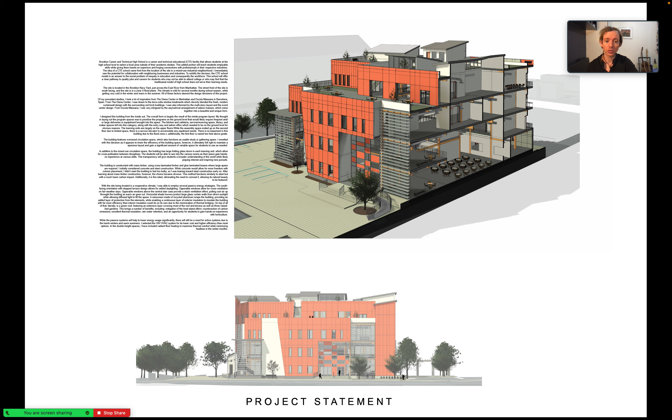A couple of the precedent models I took a lot of inspiration from are Escola Massana in Spain and the Diana Center in New York. I was really drawn to the off-kilter, boxy, sort of askew massing of these buildings, and I conceptualized them by massing them out in SketchUp and sketching. One thing I thought was really interesting was the terracotta window treatment on the Diana Center, which is designed to help blend with the nearby old brick buildings - a great way of blending the old with the new. That's something I incorporated into my project as well.

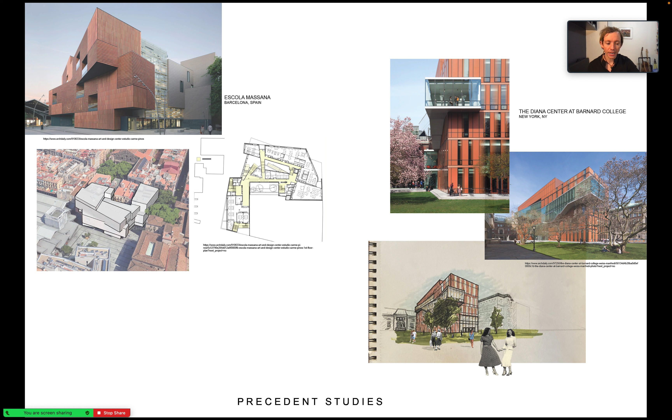My approach to this project was to design it from the inside out. I started with the program spaces and arranged them in the way that made the most sense to me. Being in New York, it's a pretty small site, so I knew I had to stack. Also, we're in flood zone X, which has a moderate risk of flooding, so I couldn't have a basement and needed to start on the ground floor.

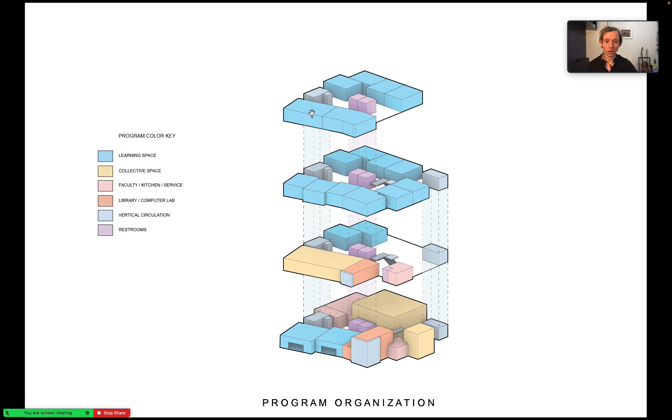I started with the spaces that I felt needed to be prioritized on the ground level - maybe spaces that needed to bring in heavy equipment, with deliveries coming to and from the space. So I put the kitchen, the cafeteria, studio spaces like shops that might have large equipment brought in, and the library on the ground floor. Most of the learning units are stacked on the upper floors.

I decided to go with mass timber construction. I was originally thinking steel, but felt concrete would be a little too bulky - I wanted it to have a lighter feel. Once I learned about mass timber, the decision was an easy one, because it served everything I needed at a much lower cost to the environment. And it just looks great too.

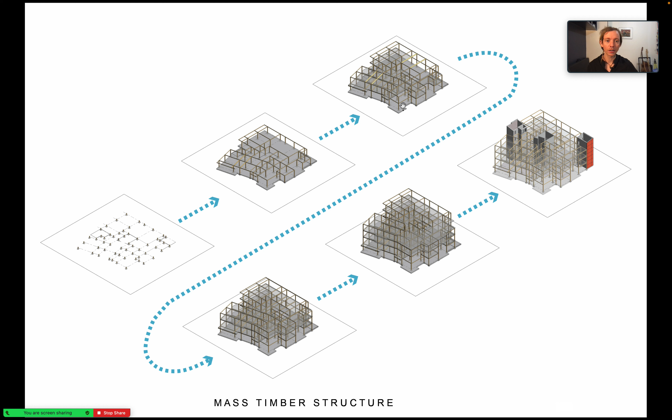These are the shear walls around the stairwell, the fire stairs, and the restroom here in the core. And you can see the glulam beams over here, where you'd have a continuous span of more than 30 feet.

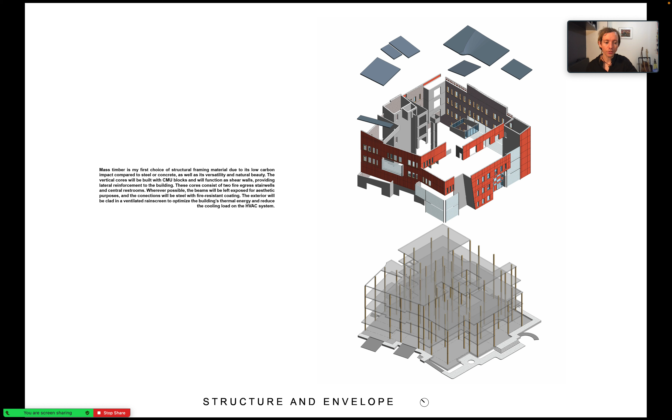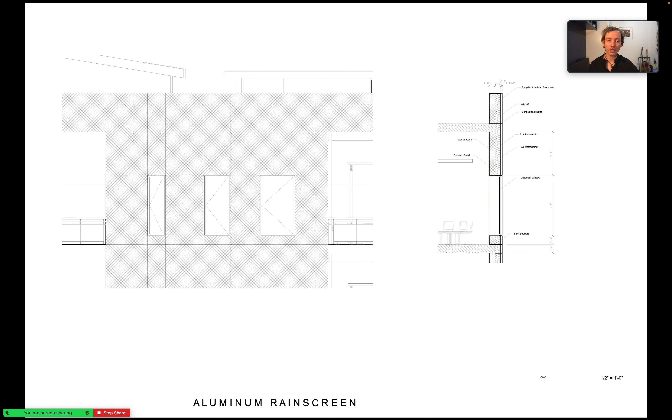There's a rain screen wrapping the building, and that's where I incorporated the color that helps mesh with the brick on the buildings nearby. This rain screen is made of recycled aluminum, and it offers a lot of added insulation. The biggest benefit is this layer of insulation on the outside of the building, which prevents thermal bridging, resulting in a much tighter insulation that makes the building envelope more efficient.

I decided that it is something that I really wanted to maintain, that extra wide circulation space, because it can be used for studying or group activities, or it could be used for learning outside of the classroom as well.

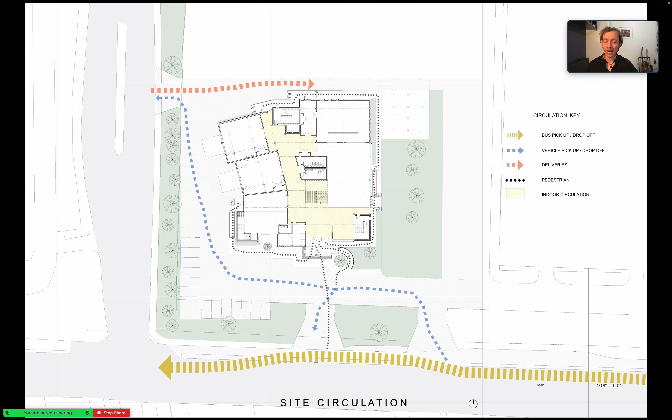So if we look at the first floor plan, you can see a little bit of that circulation space lined with tables and areas for working, as well as the cafeteria and kitchen back here, and these maker spaces, and then the library, which has a split level for the computer lab, right here.

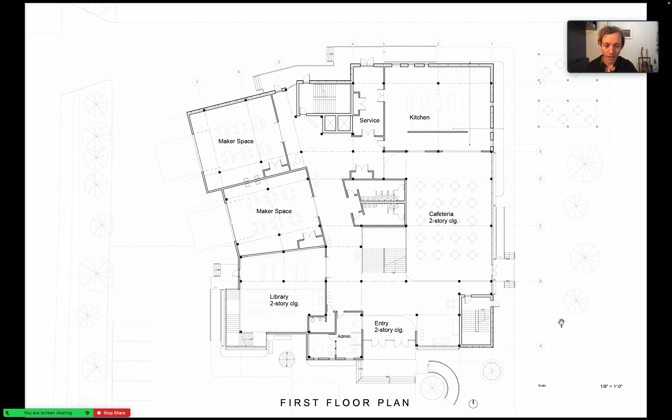And then we have kind of a faculty lounge here, and you can really see the oversized circulation on this plan. So if we look at the next scene, you can see there's lockers along there.

Some of these classrooms I arranged in the Socratic seminar method. They can be rearranged, but I wanted to give a different approach to learning that's a little more involved, more interactive, and less of the rows just facing a board.

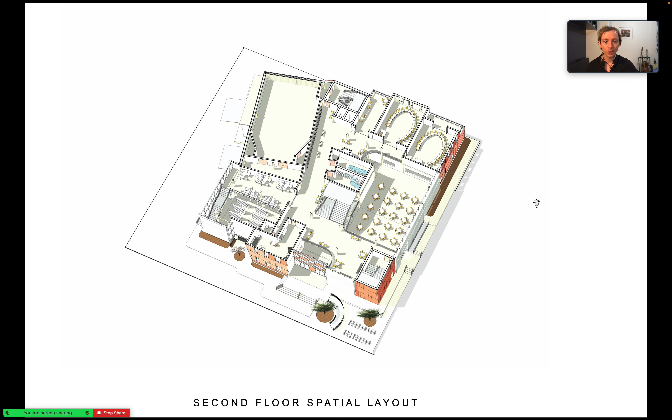Another important thing is these wide glass folding doors in all of the classrooms, which allow for a cross-pollination of different studies, especially in the career and technical school, where students are doing a lot of hands-on skill learning. Their peers can see through the windows and get an idea of what everyone else is working on, which will hopefully inspire some new pursuits and pique some new interests.

And then we can see the building is oriented towards the south, giving more daylighting, as we have this kind of terraced design. You can see some of the indoor-outdoor spaces.

This is like a big patio, so you have connections to nature within the building, and then a lot of opportunities for cross-ventilation as well. Being in Brooklyn, there's a lot of good weather days where you could use just natural ventilation in the building.

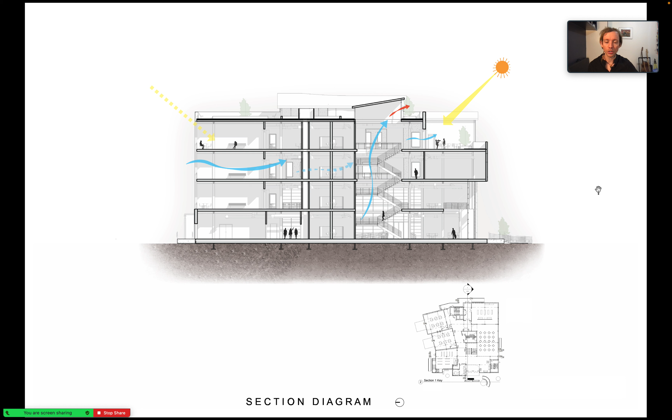However, let's look at some of the passive systems. So we have the stack ventilation effect coming up through this stairwell.

We have a green roof, excellent for many reasons, but it could also provide an opportunity for students to even learn horticulture, or it's offsetting the carbon. There's so many good reasons to have this green roof.

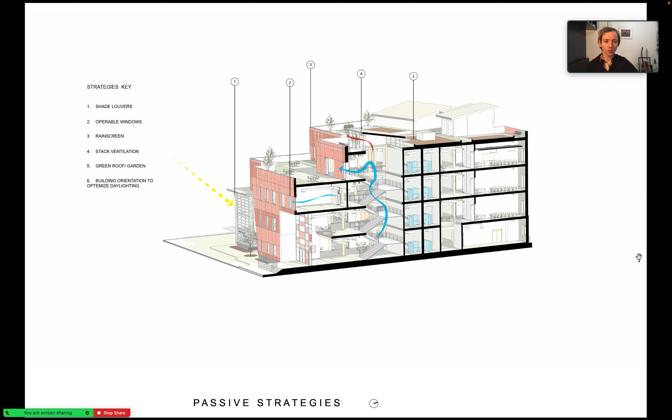But also we have these horizontal louvers in all of the large curtain walls, especially the southern facing ones and the western ones. And we have the rain screen, operable windows, so lots of opportunities for passive systems.

However, there's still a lot of cold days and a lot of hot days in this area, so we need to still have an active system. So I went with the VAV HVAC system.

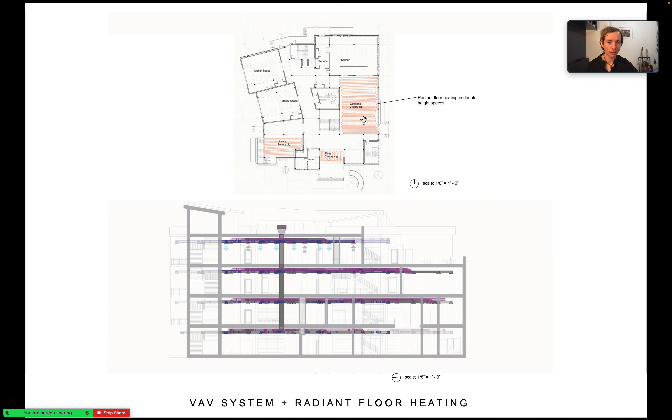It's an efficient method to go with, and then radiant floor heating, just to maximize efficiency wherever there's a double height ceiling, to minimize heat loss.

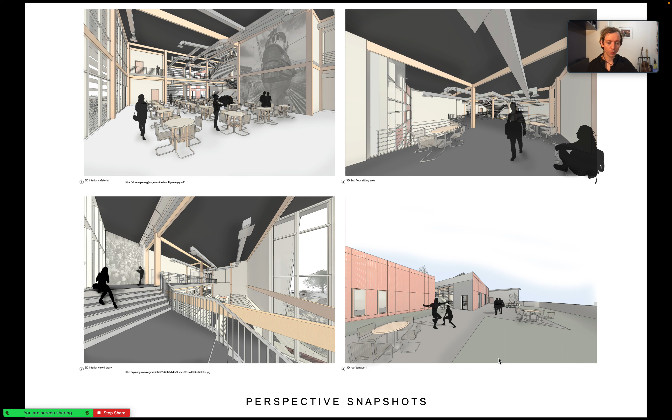Overall, my main objective in this project was to maximize my social impact while minimizing the environmental impact. And I feel like even though I have a lot to learn, there's a lot of learning opportunities, I feel very proud of the accomplishment, and I feel like I reached my goal in a satisfactory way.